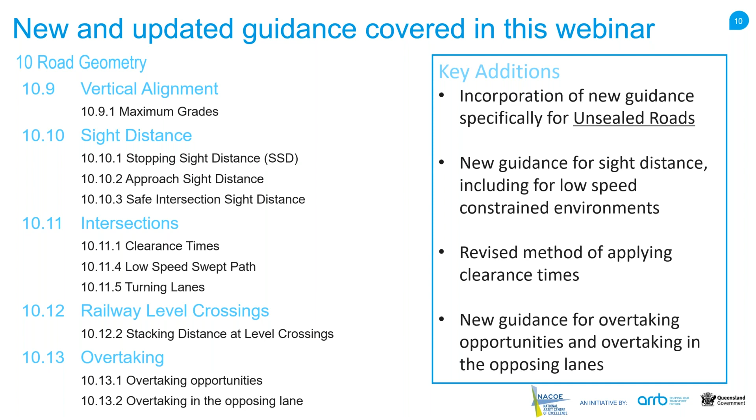Throughout this session, we'll only be looking at sections of the guide which have new or updated guidance compared to old guides. This means a lot of the areas of the guide itself are not covered specifically in this webinar series.

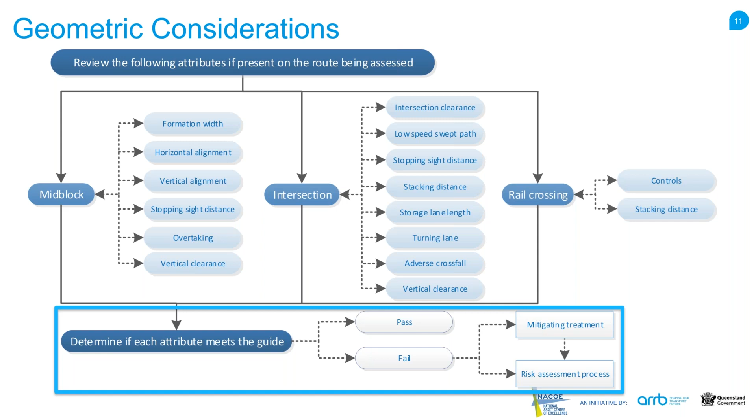The first area we're going to be looking at is the vertical alignment. We've provided some new guidance for grades on unsealed roads, and these grades provide a general maximum value. It doesn't mean that's a standard or anything like that, so it is just a guide. If you do actually exceed these on any of the routes, there are additional assessment criteria that can be looked at to determine if it's actually suitable.

It is worth noting that even if the route is under those grade limits, ascending and descending effects should still be checked, because there is a possibility that it could still exceed the guidance in the ascending and descending effects.

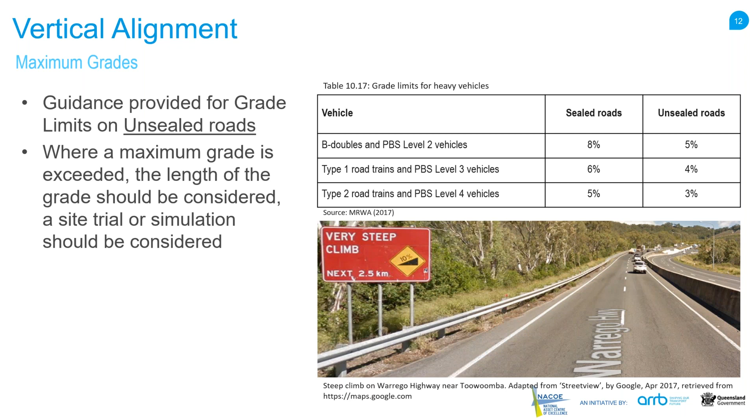The overall method of determining your stopping sight distance remains the same. Sight lines can be established from the driver's eye height to the ground level, to the object on the road surface, or to the top of the car, or, if operations are required at night, to the tail lights or stop lights. That hasn't really changed from any previous method, it's just stating those are options.

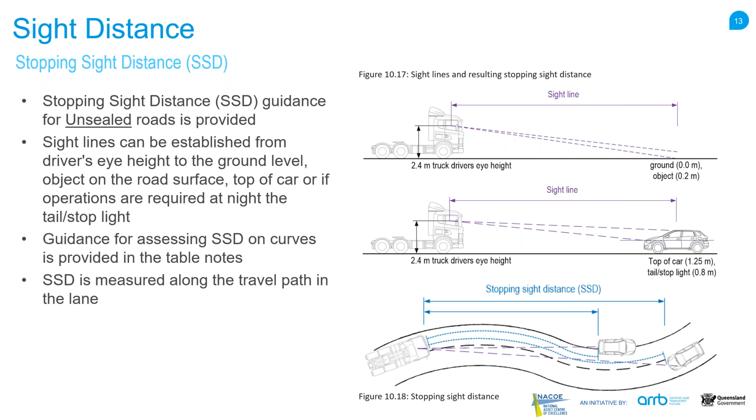In this guide we have two separate tables for sealed and unsealed roads. This is due to different skid resistances between the two, which really affects the actual distance it takes for a vehicle to come to a stop.

Road managers can identify if sight distance should be provided from driver eye height or to either the road surface or the roof of a car. It really depends on what level of risk you're willing to accept. In some situations it may be more beneficial to use the top of the car rather than the actual road surface - it's just something that would need to be documented in a risk assessment process.

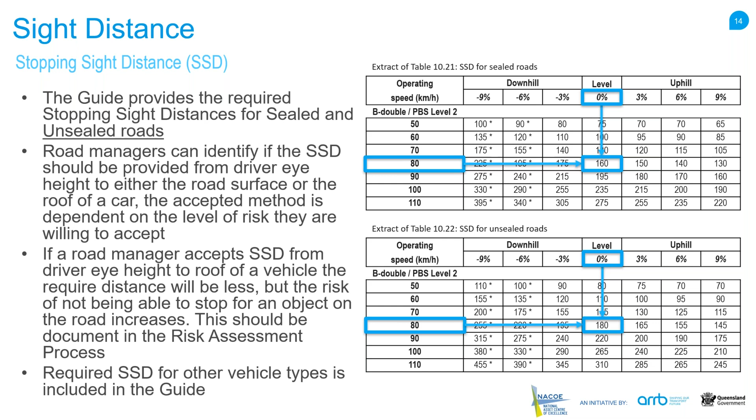One of the other sections is the approach sight distance. Again there is new guidance for that on unsealed roads, and it also provides new guidance for low speed constrained environments, which we'll talk a little bit more about in a second.

The approach sight distance is assessed for heavy vehicles stopping for traffic control devices, such as give way signs, stop signs, traffic lights, anything like that. And the approach sight distance is measured along the travel path in the lane to the holding line.

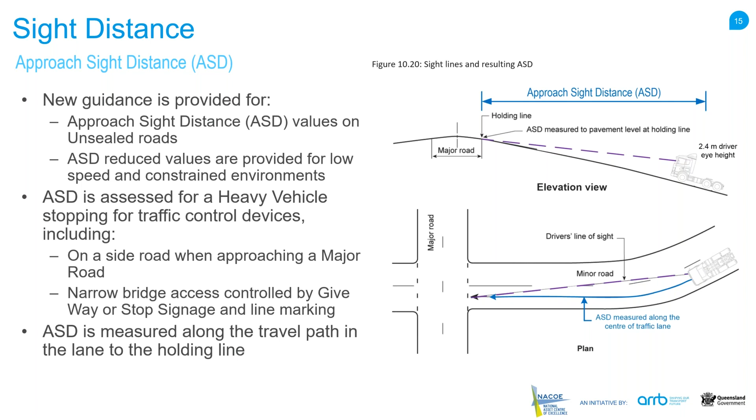That could be in a number of different areas, and it does provide a slightly different way of measuring that. Obviously in certain areas there is less space, so there could be less sight distance available. However, if the driver is alert going through those areas, then they may not require as much time to stop or to brake.

The approach sight distance values for unconstrained environments will still use the stopping sight distance values from the previous section that we looked at. So this is mainly around those low speed constrained environments here.

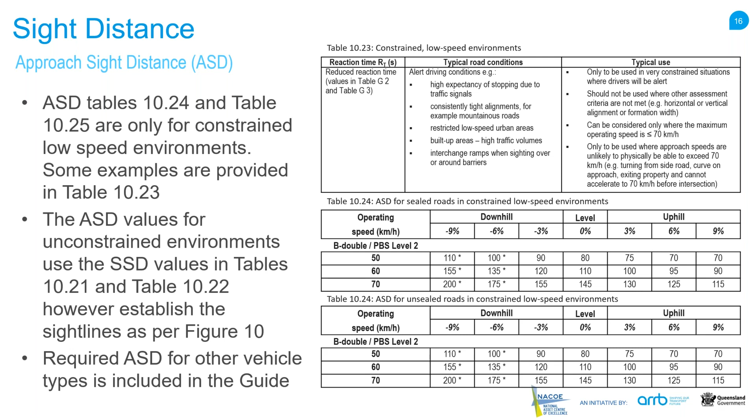So again, for safe intersection sight distance, we've got new guidance for unsealed roads, and that's a bit of a trend here, lots of new guidance for those types of roads. Other than that, safe intersection sight distance doesn't have a lot of changes.

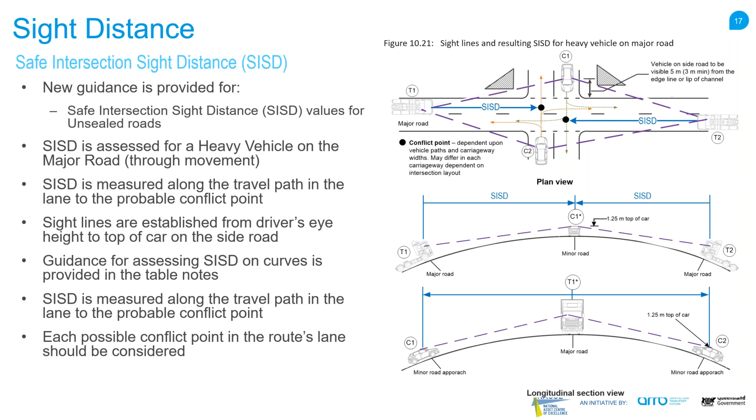It's similar to the last couple of sight distance sections we've looked at. The main difference between this guide and some of the previous ones is the additional emphasis on unsealed roads, providing extra guidance since we've seen a lot of local governments request more guidance around unsealed roads.

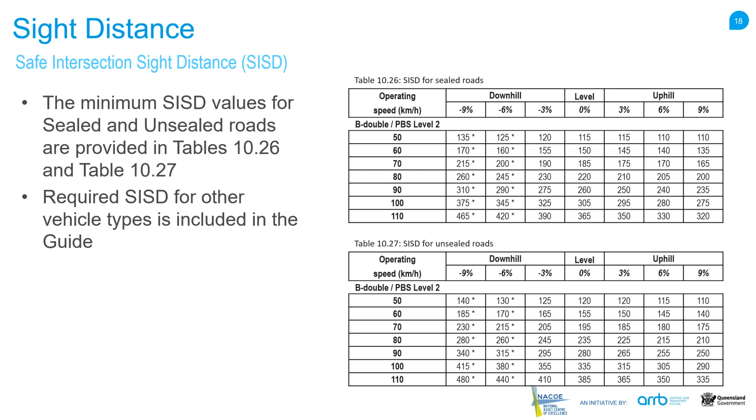All right, so enough about sight distances for now. Now we're looking more at the intersection side of the route assessment itself, so this part is more about clearance times. Previously, clearance times were classified as green times for intersections, which didn't really make sense in the situation of an unsignalized intersection, so instead it's now been retermed as clearance times.

This allows a road manager to modify signals, hardware and programming to cater for access, but it also allows you to use this for unsignalized intersections based on headway of vehicles. Clearance times can be used to assess maneuvers at signalized and unsignalized intersections, including right turns from a median, and that's where the headway part comes in - if your headway between vehicles is greater than your clearance time, then that's great.

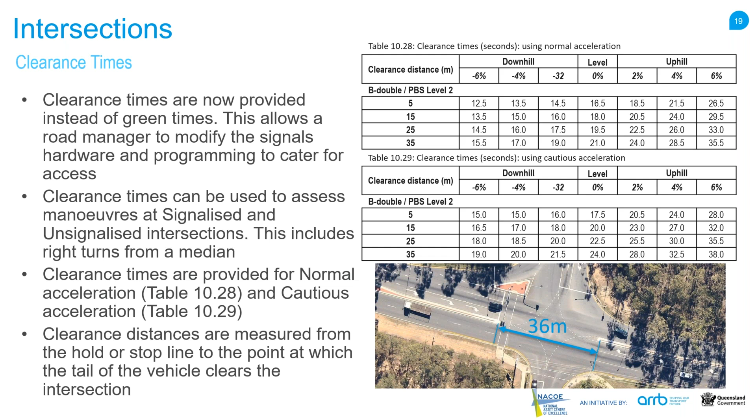There's also a bit of additional guidance around how to assess a low-speed swept path and what level of clearances are required between the vehicle and any infrastructure or other lanes or line markings on the intersection. We've got a lot of diagrams detailing the required offset distances for roadside objects, cyclists, opposing vehicles, adjacent vehicles, etc.

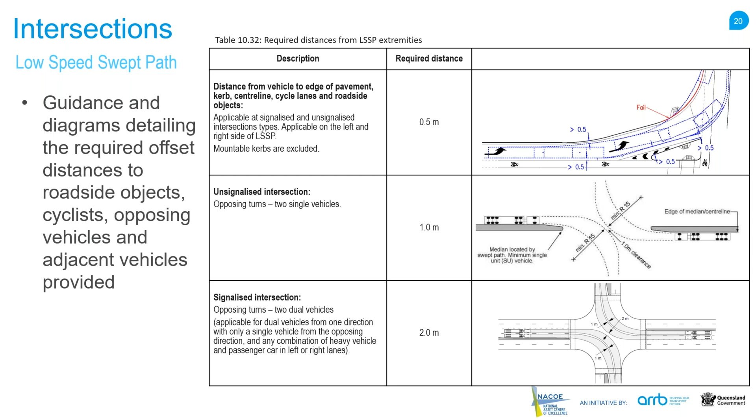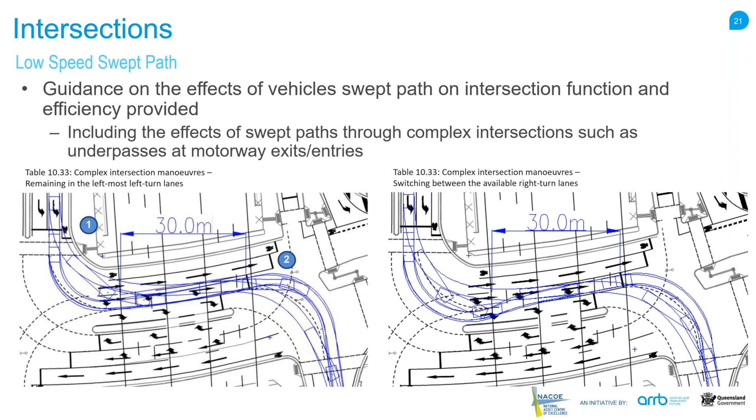So one of the sections that is relatively brand new in this guide is more focused around overtaking of heavy vehicles on really any road type. One of the things we've done is put in this flow chart, which really details the process to undertake that overtaking assessment.

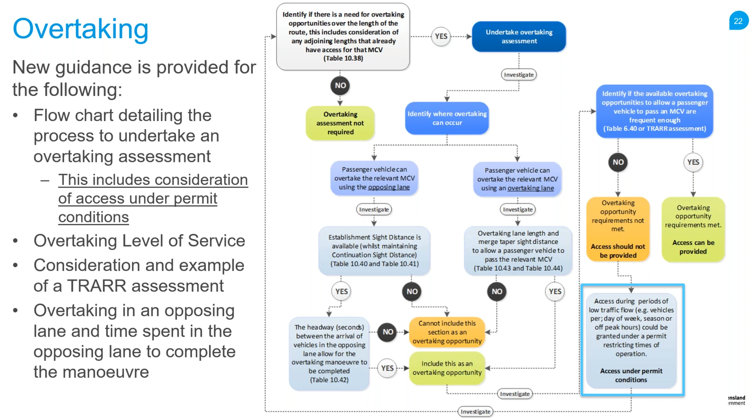There's a few things that were added: overtaking level of service consideration, use of a TRARR assessment, and overtaking in the opposing lane and time spent in the opposing lane to complete the maneuver. We'll talk a little bit more about those in a second.

So that first one mentioned was the overtaking level of service. It affects the operational efficiency and safety of the road, and also takes into consideration the delay that drivers may experience when they're stuck behind a heavy vehicle.

One of the ways to assess this is a TRARR assessment - a traffic on rural roads assessment - which identifies the level of service along the length of a road if a heavy vehicle was to be given access. The TRARR assessment identifies how and where overtaking opportunities should be provided to improve the level of service if that access is given.

So type 2 road trains or PBS level 4, the recommended level of service would be B. This gives other road users plenty of opportunities to overtake those heavy vehicles.

There is research that's been done that states that vehicles travelling behind heavy vehicles for prolonged periods of time - it's more typical for them to proceed in risky overtaking manoeuvres, which is something we don't want to see on the road.

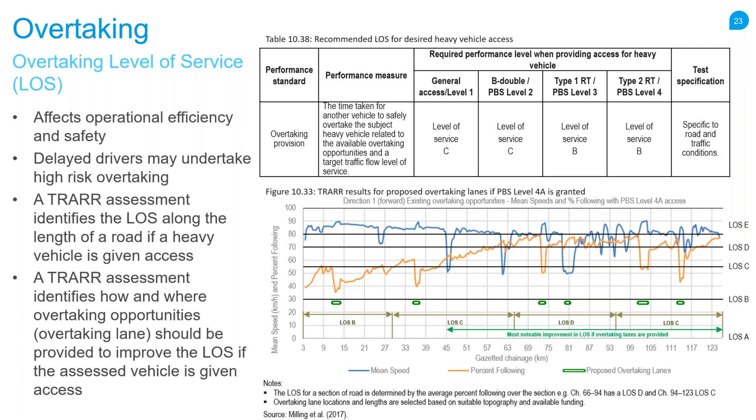So the second part of that is overtaking in the opposing lane. If overtaking sight distance is available for a vehicle to overtake a heavy vehicle using the opposing lane, consideration needs to be given to determine if the gaps between vehicles arriving in the opposing lane will allow the overtaking vehicles to complete the maneuver.

We've got an example of how to undertake these overtaking assessments. This is just providing what that new guidance is, and then we'll kind of walk you through how to do it in more detail shortly.

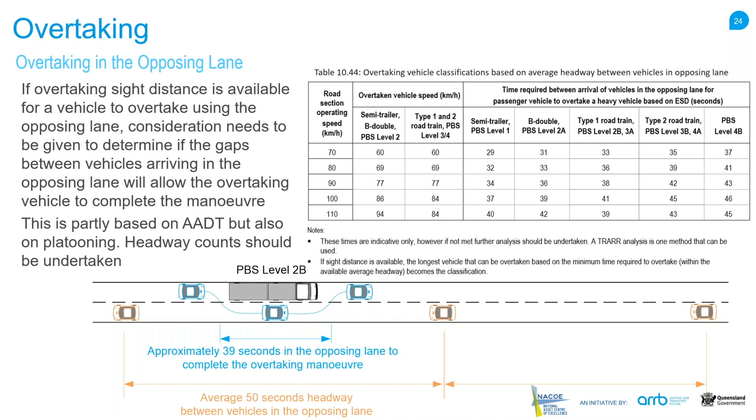All right, so I'll take a little bit of a break there before we move on to those examples I mentioned before, just to answer any questions. I know we did go through that a little bit quickly, but it was more just to outline that new guidance, and the examples will provide a lot more in-depth detail.

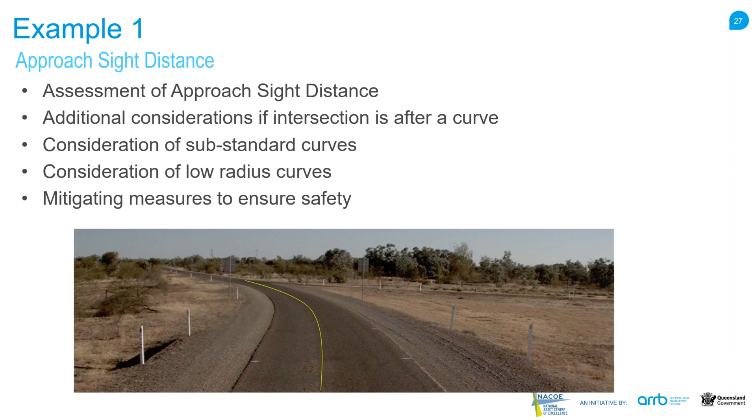For this example, we're going to be assessing for a B-double vehicle access on this rural sealed road. So the questions are: how do we assess the ASD required on straights and curves? What happens if it does not meet the values in the guidelines? And how do we grant access using a risk assessment?

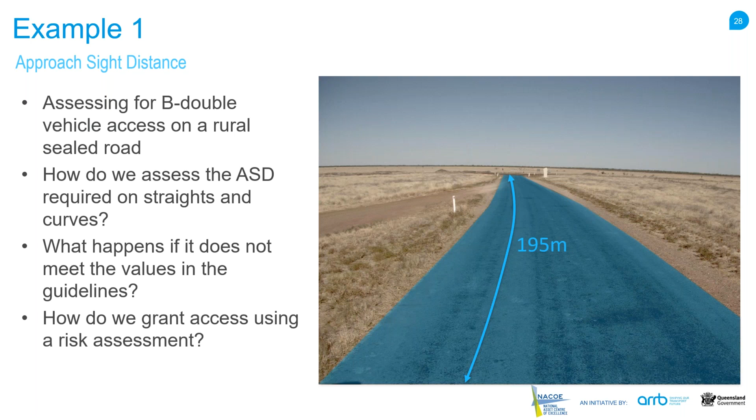So here we've already measured what our approach sight distance is for this. There is actually a T-junction at the end of this road where there is a hold line. We've measured 195 meters to that hold line, and now we're going to check what the recommended guidance is for that.

Obviously we want to assess against the relevant table in the guidelines. This is an unconstrained environment, so we use the stopping sight distance values from section 10.10.1 of the guide, or table 10.21, which is stopping sight distance for sealed roads.

Again, we've got what our measured values are on the left there. Our vehicle is the B-double, our operating speed is 80 kilometers per hour, and there was a bit of a downhill grade, about 3%. Our measured approach sight distance was 195 meters. Once we put all that information into the table on the right, we can see that the recommended ASD is 175 meters. So we've actually met that requirement, which is fantastic. That means that vehicle should be able to stop safely within that distance.

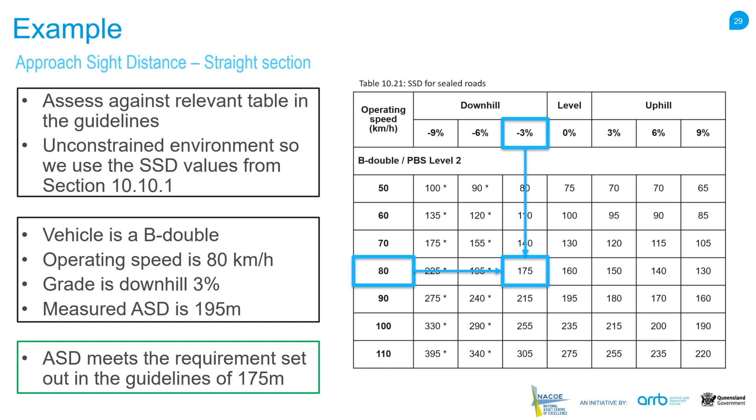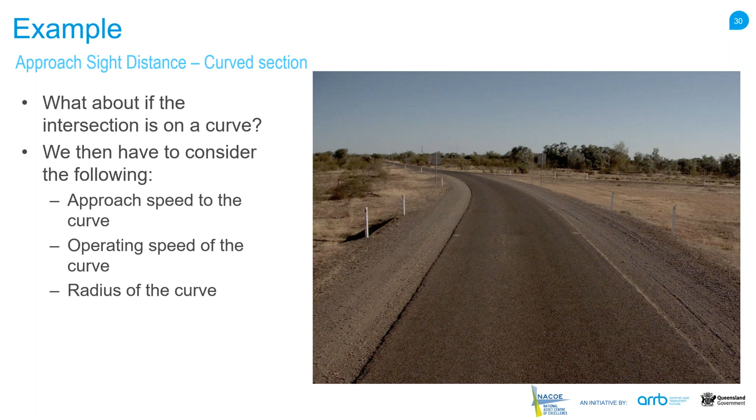So what about if the intersection was on a curve though? We then have to consider the following: the approach speed to the curve, the operating speed of the curve, and the radius of the curve. This takes into account a lot more things.

The first thing we want to do is try and work out what those approach distances are, what the radius of our curve is, and what our approach and operating speeds are. I've used some Nearmap imagery here to work out what the radius of that curve is - we've estimated it to be about 300 meters. We've also got a little image here on the right, and for whatever reason that give way sign was blurred out, so I put a bit of an image there so you could see it's actually there. It's also got our measured distances.

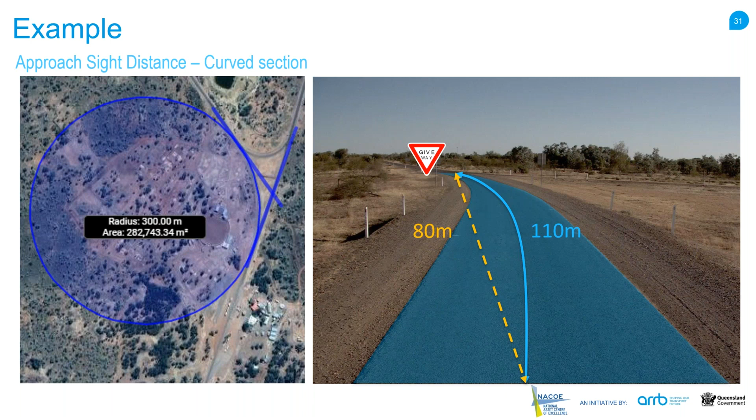For curves, one of the first things we want to do is determine if it's classified as a substandard curve in the guidelines - something we touched on yesterday. It's looking at the speed difference between the approach speed and the curve operating speed. If the speed difference is greater than 15 kilometers per hour, then it's classified as a substandard curve, and it requires us to use a slightly different table in the guide that accounts for a lower deceleration rate.

In this instance, our approach speed is 80 kilometers per hour, and our operating speed on that curve is 60 kilometers per hour. So we now have a speed differential of 20 kilometers per hour, which is greater than that 15 kilometer per hour recommended speed. So we do have to use the guide for substandard curves - all those tables are provided in Appendix H.2, and we'll have a look at that in a second.

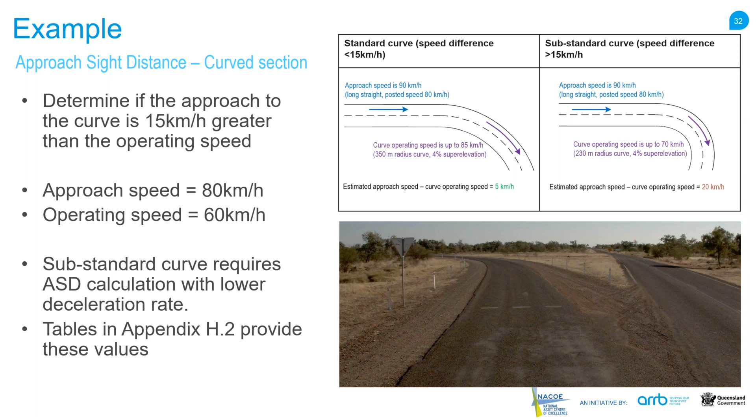So now our next step is to find out what our intended stopping sight distance should be for that curve. Again, we have to assess against the relevant table in the guidelines. Since we are using that substandard curve, we use the stopping sight distance values from Appendix H.2.1.

Again, our vehicle is still that B-double. The operating speed is 60 kilometers per hour, and the grade is flat. Our curve radius is also 300 meters. When we plug all these values in, the guide is essentially telling us that for a 60-kilometer operating speed on a B-double route at a 0% grade, 115 meters is required.

However, one of the notes on these tables is that if the stopping distance occurs on a curve with a radius of less than 400 meters, then we should be increasing the distance that we need by 10%. That's to account for that reduced deceleration rate as well.

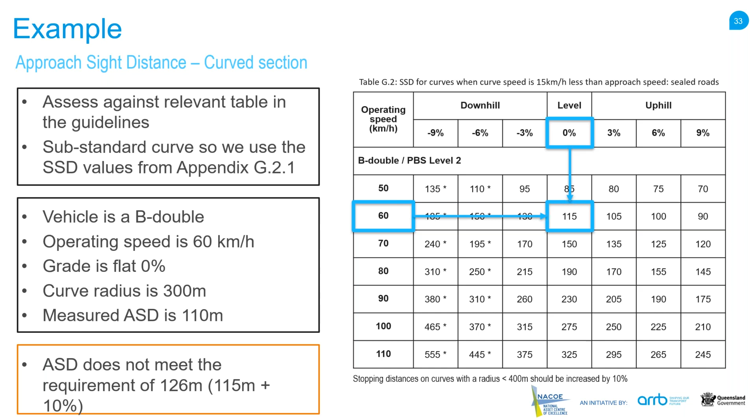So from this, we know that there is an issue and we can run a risk assessment process to determine if there's a way for us to mitigate the risk of this occurring, or if we can eliminate that risk altogether.

So what we know is that our approach sight distance does not meet the required distance in the guide. So we have a road geometry issue. Our safety hazard is the unsafe ASD, and I guess the description of that is that there is an increased risk of the vehicle not stopping before that hold line and colliding with other vehicles that are coming on the other road.

So the guide doesn't really have any additional provisions that can be provided around this. When we were talking about formation widths, there were a few additional provisions that we could check to see if we can grant access based on that, so this section does not have anything like that. So we do have to use the risk assessment process to determine what our risks are and how to mitigate those.

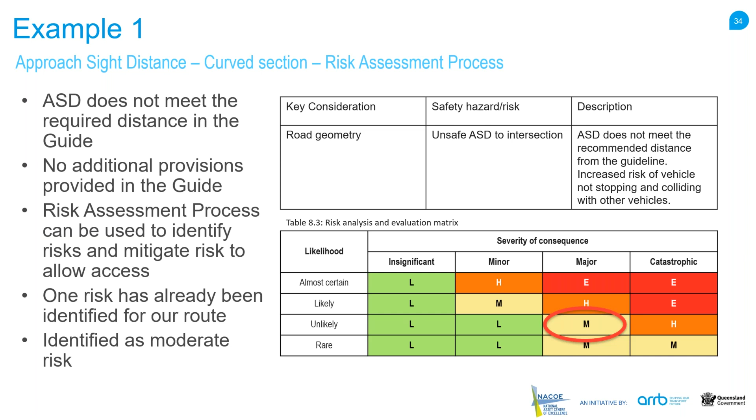So we've already identified our risk there, and when we look at our risk rating, the likelihood of it happening is unlikely because it is quite close to the recommended guidance. However, the severity would be major, so we end up with a moderate level of risk.

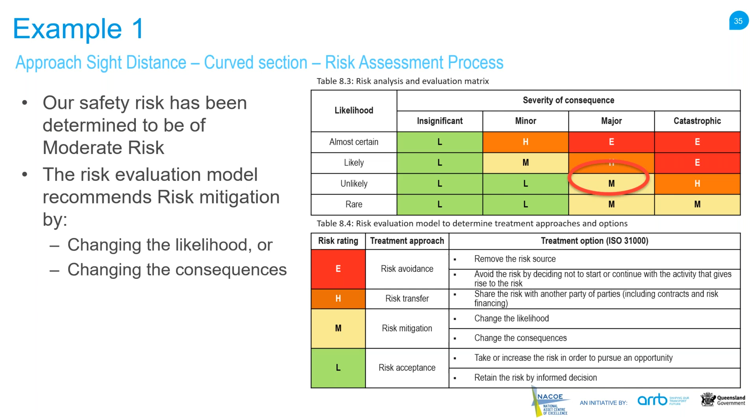As we've discussed in a few of the previous sessions, any treatments that we do choose should be made based on the principles of treating risk, which means we should be prioritizing the most severe risks first, balancing the costs and requirements of treatment, involving any relevant stakeholders in the decision, and being careful of any secondary risks caused by any treatments that are implemented.

So like in the previous examples, we've come up with a few treatment options, and in this case we've still got those three treatment options: speed, signage, infrastructure. The speed one is to limit vehicle speeds as a condition of access. Signage is to erect signage warning drivers of the curve ahead and to reduce speed. And the third one is to change the road geometry to have a larger radius and more sight distance.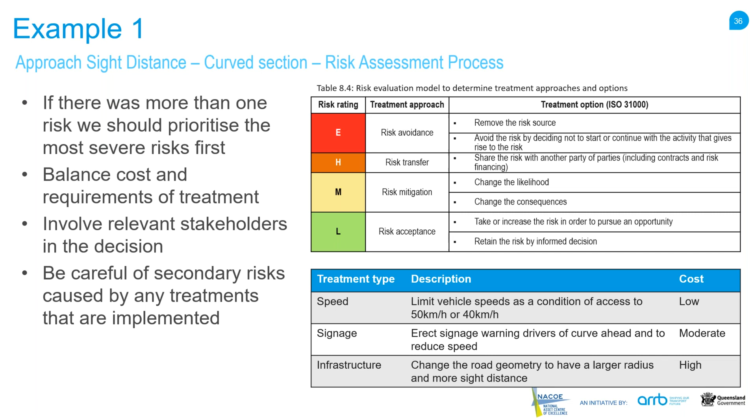So in this instance, signage would most likely be our most optimal solution, and we would use that signage to reduce the approach speed to the curve to an acceptable level. If we actually lower that approach speed, it would mean that curve would no longer be treated as a substandard curve. So if we put in some of these signage options, things like slow down, there's a curve ahead, potentially a rollover risk.

If we added that signage prior to the curve, then we could change what the approach speed is. So instead of having an approach speed of, say, 80 kilometers, we could have it as 70, which would change our speed differential.

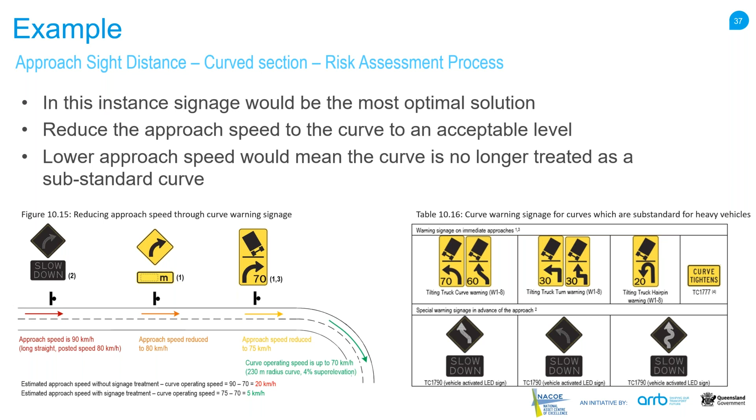So with that speed differential in mind, we no longer have that substandard curve, so we can just use the normal stopping sight distance from table 10.21. What this means is basically we can calculate for a different value, so here we're actually calculating a recommended stopping sight distance or approach sight distance of 100 meters.

We still do need to take into account the fact that the radius is less than 400 meters, so we do still need to apply that 10% on top of that. So the recommended guidance is saying that we need 110 meters of approach sight distance, which is great because that's exactly what we have.

So there are ways of using that risk assessment process to implement those changes and then going back and checking the guide to see what is now possible. In this case, we added that signage, changed the curve type to a normal curve, and then we were able to use a different set of criteria to assess that route. In the end, we've ended up reducing the risks quite significantly, and now access on that road is more valid, and we can probably provide access to that.

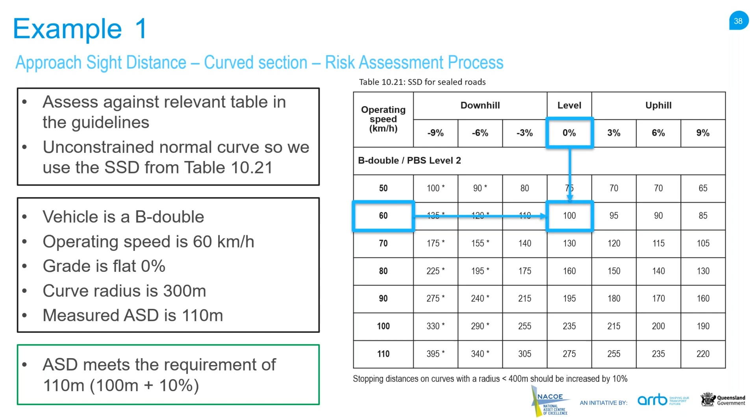All right, so that brings us to the end of the first example. I'll just take some questions before we move on to the example looking at overtaking in the opposing lane.

Isabella, have we had any questions come through? Hey Kieran, everybody must be saving them right to the end. We don't have any at the moment, so we'll keep moving. All right, geez, at this rate we might actually finish a little bit early.

All right, so our second example is overtaking in the opposing lane. We'll also look a little bit at overtaking opportunities, the establishment of sight distance, the continuation sight distance required, and then also the available headway to make that maneuver.

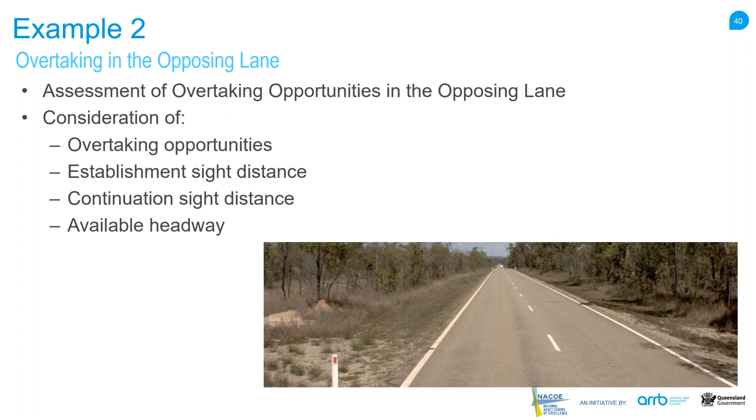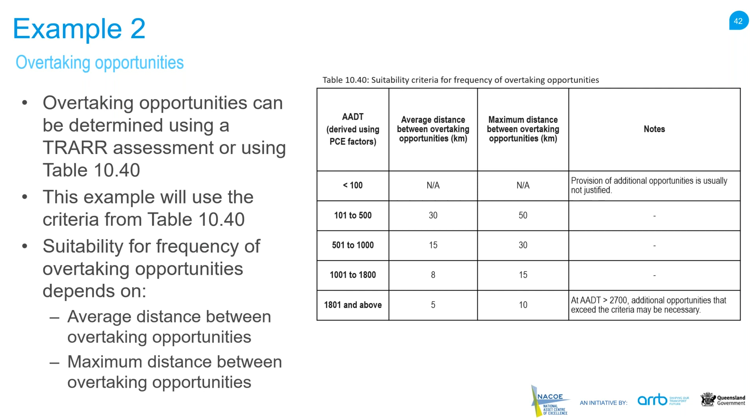From the guidelines, overtaking opportunities can be determined using either the TRARR assessment method or using table 10.40, shown on the right here. For this example, we're just going to use the criteria from table 10.40, which looks more at the average distance between overtaking opportunities and also the maximum distance between overtaking opportunities. It's also determined based on the AADT. So we're going to jump into that now.

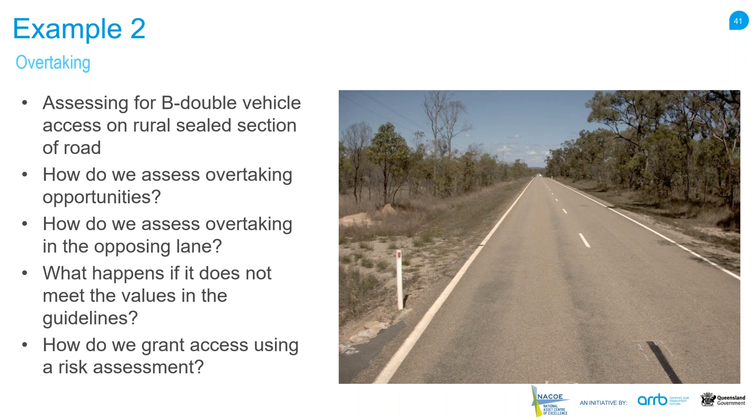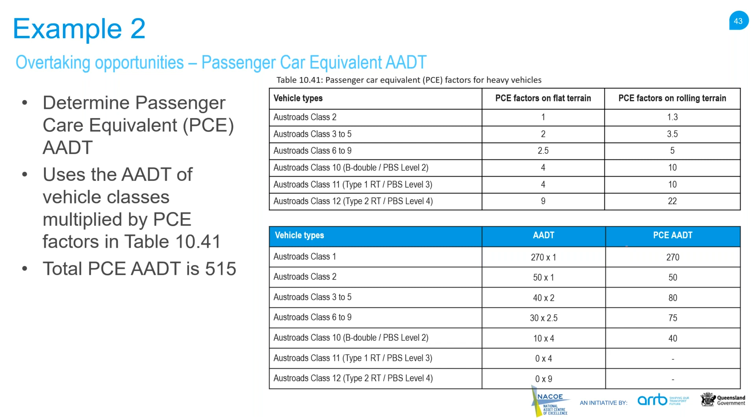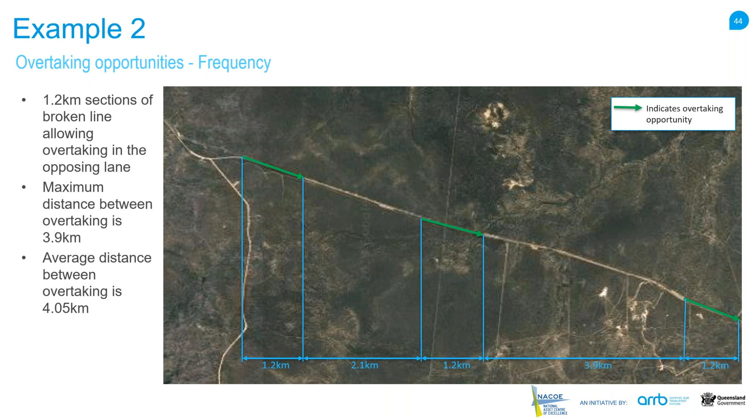So all we had to really do is work out what our maximum distance was between the overtaking - we can see there that it was 3.9. And then we also need to work out what our average distance between overtaking is, which ended up being 4.05, which I think I have also counted into a few other things.

So then from that, we essentially just need to assess against table 10.40, which we saw before, and like usual, plug in our values. The fact that we're using a B-double doesn't really matter in this situation. Our AADT with the PCE factor applied does count - we've got 515, so we use that. Then we put in our average overtaking opportunities and our maximum overtaking opportunities. We can see there that the values for both of those are well below the recommended, so that's actually great.

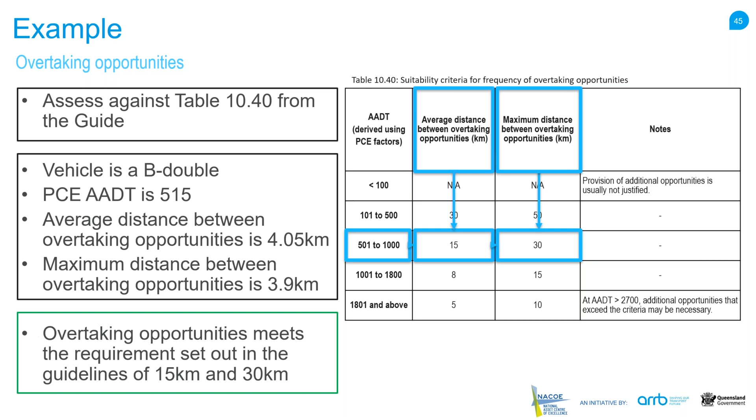So the second part of this is to look at overtaking in the opposing lane. This is built up on three different measurements: the establishment sight distance (ESD), the continuation sight distance (CSD), and the average headway between vehicles in the opposing lane, which we'll just call headway.

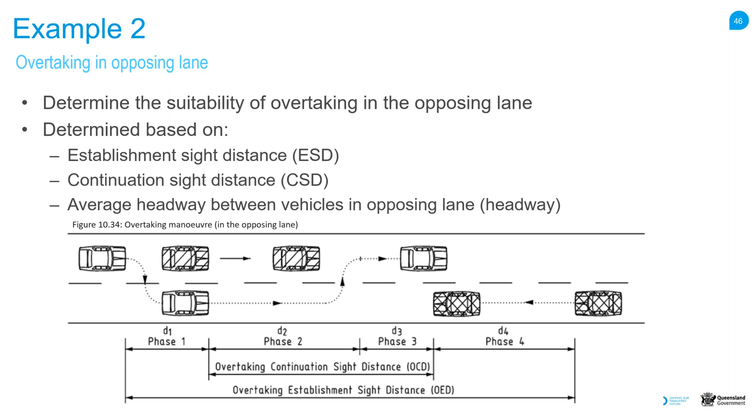At the bottom there's a diagram showing these different stages - where the vehicle is at the start, where it moves to, and what the overtaking continuation sight distance is. It provides a relatively good example of how to undertake this.

For this example, we're going to walk through these three stages of determining if overtaking in the opposing lane is suitable. The requirement is that it meets the guidance for all three. The first one we're looking at here is the establishment sight distance.

We've got the table on the bottom here, just an extract. It has additional speed ratings or operating speeds you can assess against, but we've cut it down so it all fits on one page. Like usual, we're assessing for that B-double, and we've set our speed limit as 80 kilometers per hour.

We've gone out and measured our establishment sight distance, so now we need to check that against what's recommended in the guide. When we plug those values into the table, the guide recommends 740 meters as the minimum establishment sight distance, which we've actually exceeded, which is great.

We've also got a figure at the bottom showing how to measure that establishment sight distance. This distance is measured based on the vehicle, the blue vehicle, in its lane - how far it is able to see down the road to determine if a vehicle is coming. The orange vehicles represent vehicles coming in the opposing direction. We'll see this same figure in the next couple of slides visualizing the other two criteria.

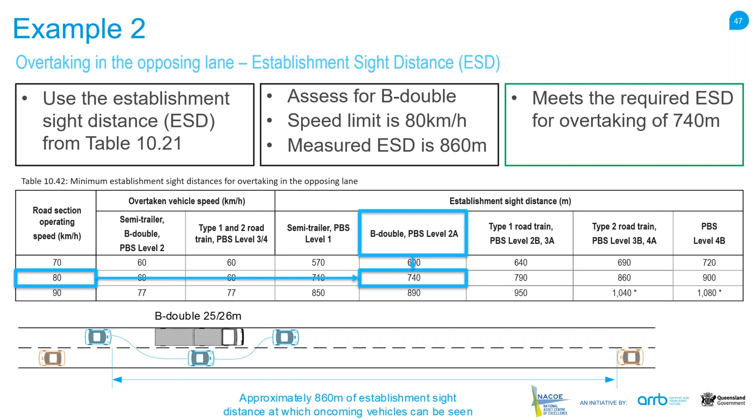The next one is the continuation sight distance, very similar to the previous one with a few slight tweaks. Looking at the figure on the bottom, the continuation sight distance is once that vehicle has moved out into the oncoming lane, how much sight distance it has at which any oncoming vehicle can be seen when doing that overtaking maneuver. So it's similar to the previous one, but with some caveats.

Again, we've measured what our continuation sight distance would be, and we've come up with 560 meters. Then we check what the recommended value is, which turned out to be 400, so that passes as well.

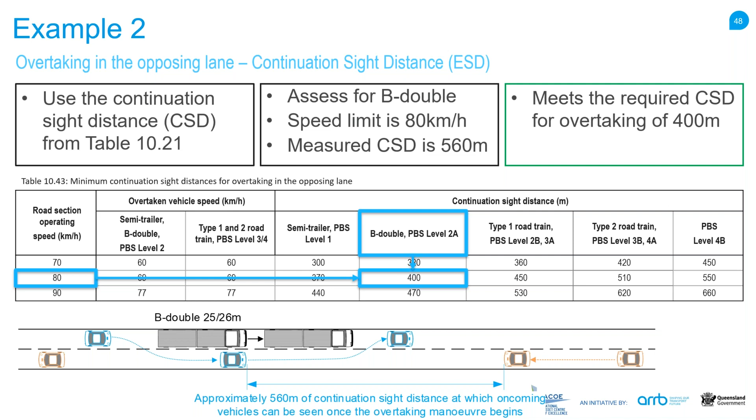The final one is the average headway, which looks at how frequently those vehicles are actually traveling along that road. At the bottom we've got that figure again with the orange vehicles - we've got three of them here, and we're estimating that the average time between those vehicles passing the blue vehicle is about 45 seconds. That's what we classify as the average headway between vehicles in the opposing lane.

This is looking at how long it would take for the blue vehicle to overtake that B-double vehicle - whether it would have enough space there. When we measure that, the recommended guidance is that there needs to be 33 seconds of average headway between the vehicles, and our vehicle is able to clear that in 29 seconds. So it's pretty close, but it is making it.

We've actually measured that for that stretch of road, the headway between those vehicles is actually 50 seconds. So that's more than enough to be able to actually clear that distance.

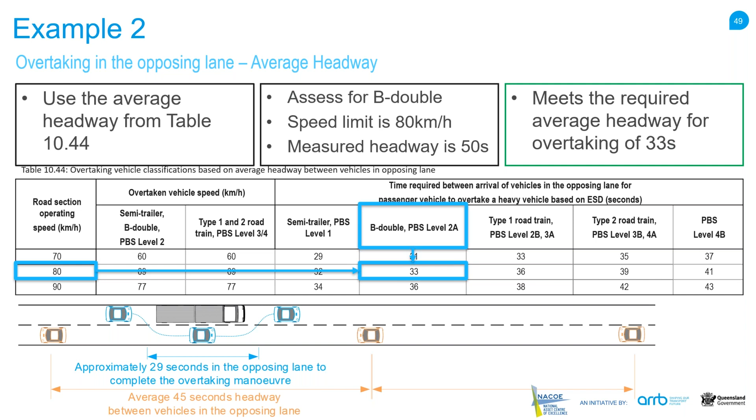So in summary of all that, from the assessment we found that there was adequate overtaking opportunities at regular intervals. The average distance between overtaking opportunities was less than 15 kilometers, which in this case is actually a good thing. Usually in a lot of the other stuff we've been looking at, you want to be bigger than that number, but not in this case.

We want to have more overtaking opportunities more frequently. And again, the maximum distance between overtaking opportunities in this case was less, which again was a good thing, because we don't want to have as much distance between them.

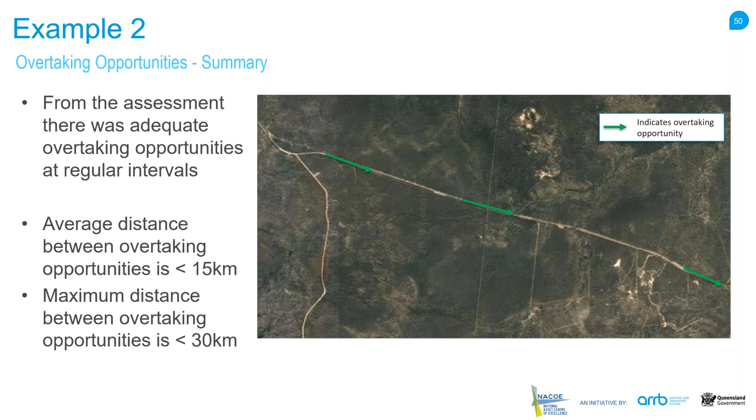And then the summary of the actual overtaking the opposing lane. So again, from the assessment, the available overtaking opportunities in the opposing lane was found to be adequate. The establishment sight distance was greater than the 740 meters recommended in the guide, the continuation sight distance was greater than 400 meters, and the average headway between vehicles in the opposing lane was greater than the 33 seconds that was recommended.

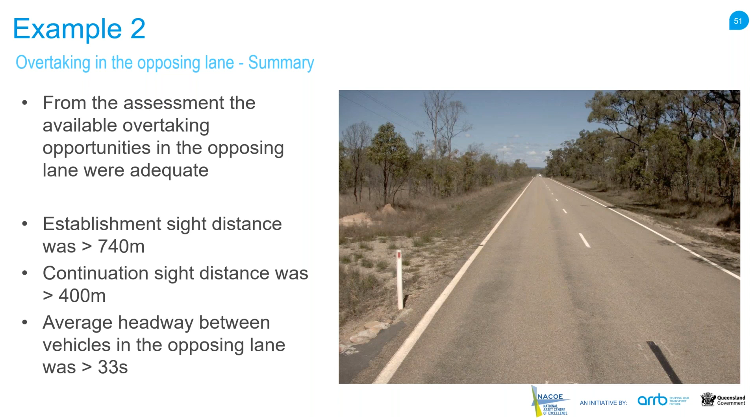So that pretty much brings us to the end of that example, and really the end of the session, which we're actually 10 minutes ahead, which is strange. So I'll just see if there's any questions that have come through.

Isabella, any questions? Yeah Kieran, we've had two questions come through. One is from Tony, and they've asked, is TRARR only available through ARRB?

I believe so, I'd actually have to double check with Dave if that's an open source program or not. I'm not too sure on the status of that. ARRB developed the program back in the 80s, and we gave it a good revamp a few years ago, and it's been put into a new software platform and package. We can check in and let you know, but I'm not clear on that either. We definitely do regular assessments in TRARR, and we continually improve the package as well. So I'm not too sure whether it's available yet. That's something we'll probably have to double check on. I guess there probably are some other software packages out there people can use if they want to. It really depends on if it provides that level of service kind of guarantee.

No worries, thanks Kieran. At the moment, TRARR is the only package that does it, which is why we've been reinvesting in it.